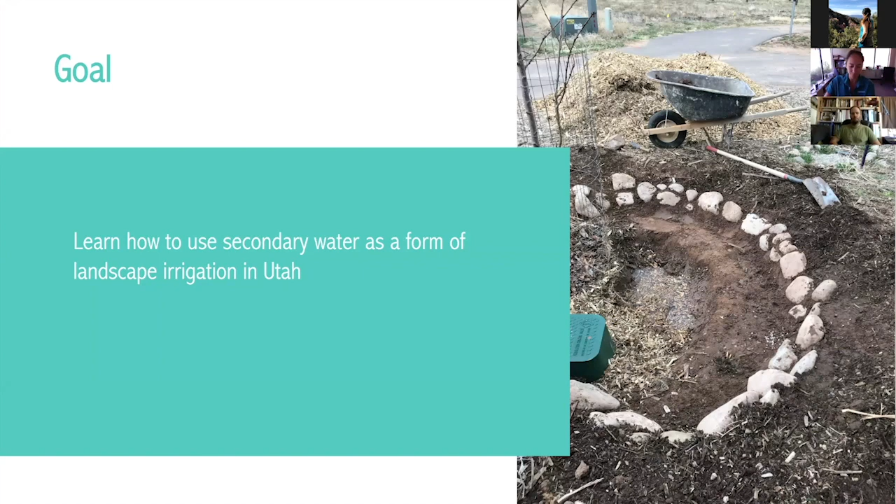And then with that goal, by the time you walk away from our presentation, even though it's only going to be about 30 minutes with us, we are hoping that you'll be able to understand the basics of Utah's gray water policy and observe system examples, and lastly, develop basic skills in implementing your system as well as you look towards designing your own home from scratch or potentially retrofitting.

Okay, so as was warned, I have a question for you all. If you could put your answer in the chat, that would be wonderful. So as we begin thinking about water reuse potential, I'm curious what fixture in the home you think the largest user of water on average may be. If you've already answered, it's okay, but for those of you who haven't, I am discounting toilets in your answer. So any fixture besides toilets that you think is the largest user of water in the home.

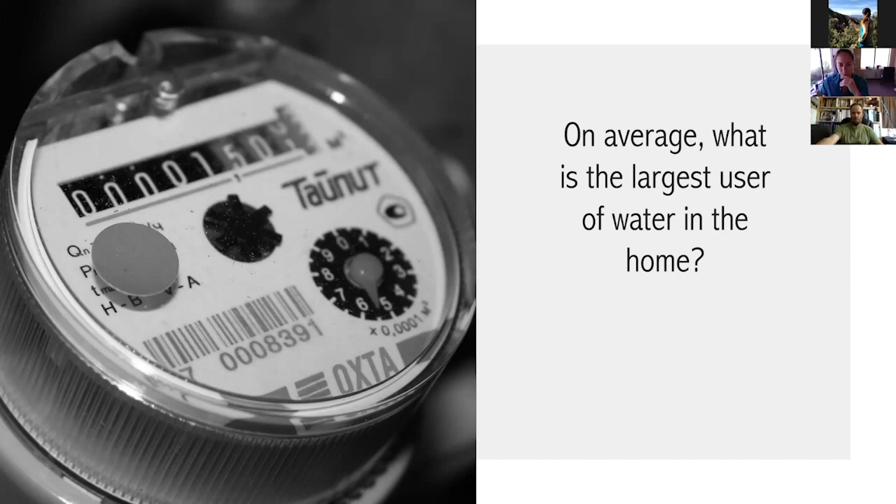So let's begin with some definitions to ensure we're all on the same page when it comes to what gray water is, but also some other terms that are associated sometimes as you're talking about gray water or water harvesting systems. So first is gray water, and you might think, gosh, I see this spelled so many different ways. It all means the same thing. It just depends where you're at, how it's spelled. So various states spell gray water differently. So graywater with an A, all connected, gray water with a space with an A, and greywater with an E, or grey water also with an E with a space, is all referring to the same thing, gray water systems.

And so the Utah Office of Administrative Rules defines gray water as wastewater from bathtubs, showers, bathroom wash basins, clothes washing machines, or laundry tubs. Gray water does not include wastewater from toilets, kitchen sinks in the state of Utah, photo lab sinks, dishwashers, water softeners, garage floor drains, or other sources that might pose a public health hazard. So that is the definition of gray water, especially in our state of Utah.

Clear water is another term that you might hear thrown around, especially when talking about gray water systems. Clear water includes water produced while waiting for your faucet to heat up. That's a common example. So you might put a pot underneath your tap, which we do constantly at our home in Moab, as that water is heating up to wash the dishes, and then we pour that pot over plants in the backyard or within our house. So that's an example of clear water.

It could also include refrigerator compressor drip, swamp cooler, and air conditioning sweat. So those are examples of what clear water is. It's treated water that is from a direct source that hasn't been used in the household otherwise.

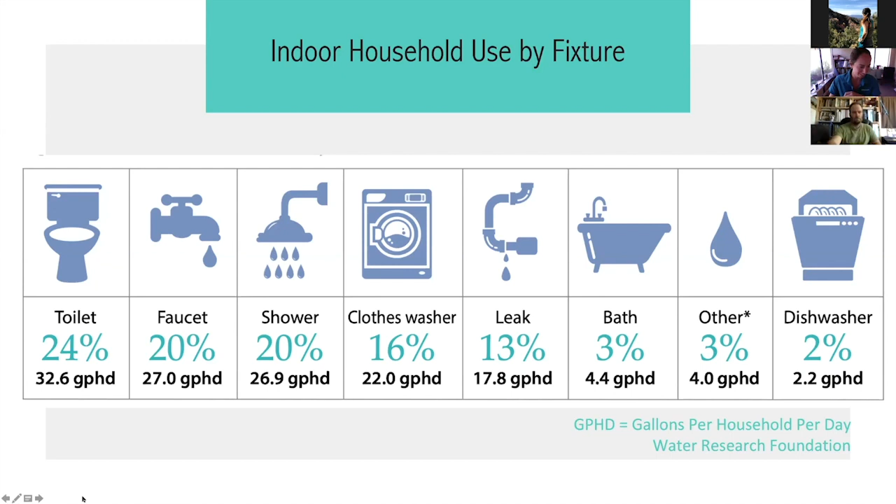Great, thanks, Roz. So I'm not going to go through the entire gray water code. I'm going to hit on a couple updated pieces of this revised code, and then I'm going to really start to look at some of the code requirements and sizing for all systems, but with a special attention to the newly allowed gravity-fed distribution system, also known as the branched drain system.

So there's like these three major things that I feel came out of this new code revision. One is that it separated gray water systems into tier 1 and tier 2. That really was inspired by some of the code that states like California and Arizona have, where they're really trying to match administrative oversight to potential risk. So in the state of Utah's new code, a tier 1 is a residential system using gravity. So just really the simplest of systems.

And those tier 1 systems require an on-site wastewater professional that's certified in level 2 to design those. In the Utah on-site wastewater treatment system, level 1 is to do soil texture analysis and percolation tests. Level 2 is to design conventional systems, and level 3 is to design alternative systems or some of the advanced on-site wastewater treatment systems.

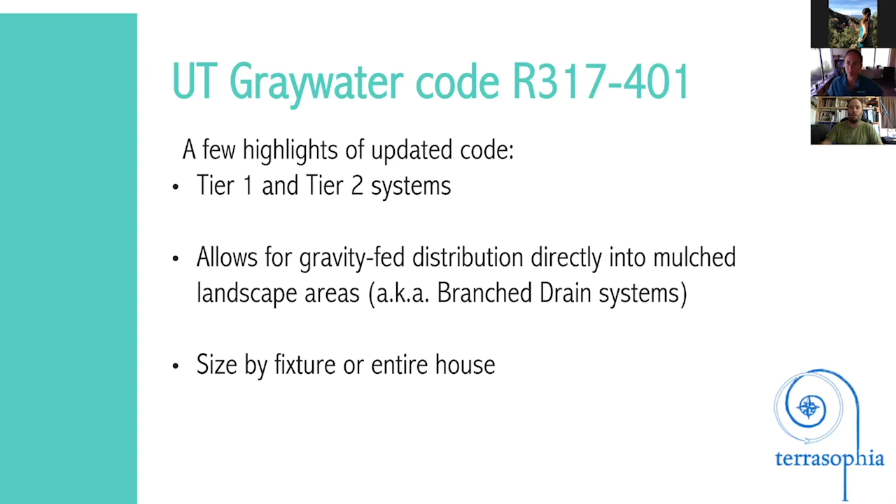And then another nice thing is that the new code allows you to size your gray water system by fixture or by the entire house. The previous code used to say you have 3 bedrooms, you need to plan on a distribution system for this many gallons per day. And the new code says, well, if you're only doing the laundry machine, you only have to size it for the laundry machine. So it gives us a lot more flexibility, especially for retrofits where it may not be possible to do a whole house retrofit, but you might be able to capture the laundry machine or a bathroom or a shower. So, all right, Nick.

So when we're designing our gray water systems, I break it into kind of 2 realms. There's one, how we have to design it to meet the code. And then the second part is the site context, and that's how we integrate it into our specific needs on site.

For these code requirements, there's a table of setbacks that says your discharge area needs to be a certain feet from your building foundation, from the property line, from any wells, culinary lines, creeks, drainages, just these different things so that we're not unintentionally discharging our gray water too close to a water body or somewhere that it might cause an adverse impact. And then as we get into sizing the discharge area, that is the square footage that you need to be able to put that gray water out on so that it can effectively infiltrate and be treated by your local soils.

And that is based on soil texture, and that's where you look at the different relative amounts of clay, sand, and silt, as well as the soil structure. And the soil structure is whether it's a sand, which is going to oftentimes be very granular. As your soil texture develops and roots and life get in the soil, you start getting a blocky or crumbly structure. And so depending on your soil texture and your soil structure, you'll be required to have a certain discharge area, essentially gallons per square foot per day.

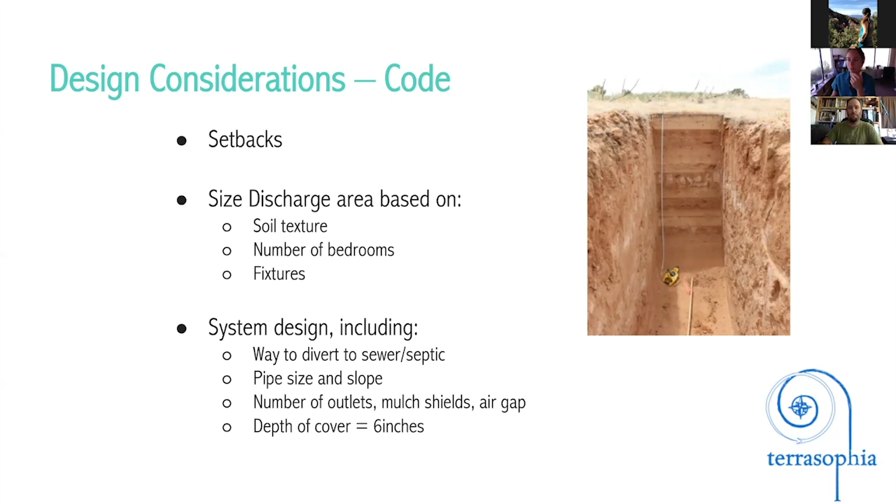And then within the code, there are these other best management practices, some of them very common sense, but they just need to be put out there to make it clear to the system designer as well as the property owner and the system maintenance that this gray water is not intended to have any human contact. It's not allowed to pond up on the surface or run off the property. You're not allowed to put it in a spray irrigation, any sort of sprinkler that will aerosolize what's in that gray water.

And then as you start to get into your plant selections, it can't come into any contact with edible portions of plants. So you don't want to grow carrots in your gray water system, or even really lettuce or something that has a fairly close edible portion to the soil surface mulch interface. And then it's also really important to think about what you're putting down your drain.

A lot of borax or other salt-based components, and then generally you're not wanting to put a bunch of bleach or other chemically hazardous things out there. And the code specifically says that photo labs and some other things like that are not considered gray water, and you're not allowed to discharge those into your landscape.

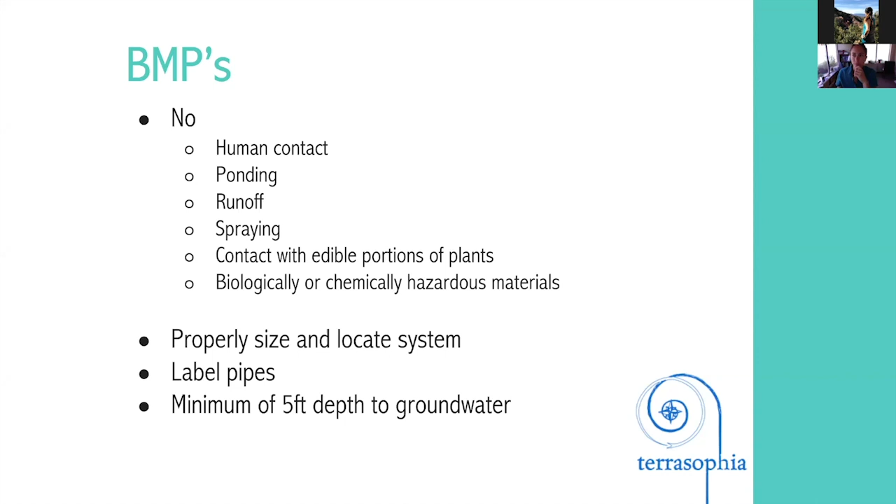So that's kind of the code context of how we're starting to think about these systems. And then I think where the rubber hits the road is, how do we actually integrate a gray water system into our landscape? And so it really becomes a bigger design picture of looking at, how do you actually use your landscape? What existing features are there? Where can you find that suitable space to have your discharge area? And then how do you get the water to that space? And so that comes into your elevations and grading.

So if you think about it, if you're having a 1/4 inch per foot, every 10 feet, you're dropping 2.5 inches. So the further you go, the deeper down your pipe is going to end up being, which isn't necessarily bad, but it's not necessarily good either. The closer we can keep that pipe to the surface, so that we're just hitting that 6 inch of cover, but not getting too much deeper, saves on cost of installation, also saves on basin shaping, because you don't have to dig as deep of a hole and play around with stabilizing those side slopes, and keeps that water up closer to the most biologically active parts of the root zone and the soil biome.

And then it's kind of going back to Roz's introduction, is really, what are all the water sources? How do we integrate gray water if we're looking to have it be some portion of our landscape water portfolio? How do we also design our landscapes so that we're making best use of any rainwater and stormwater, and if you have a swamp cooler or an AC unit that has some bleed-out water, how do we start to look at all our different sources of water and match them up to their best use?

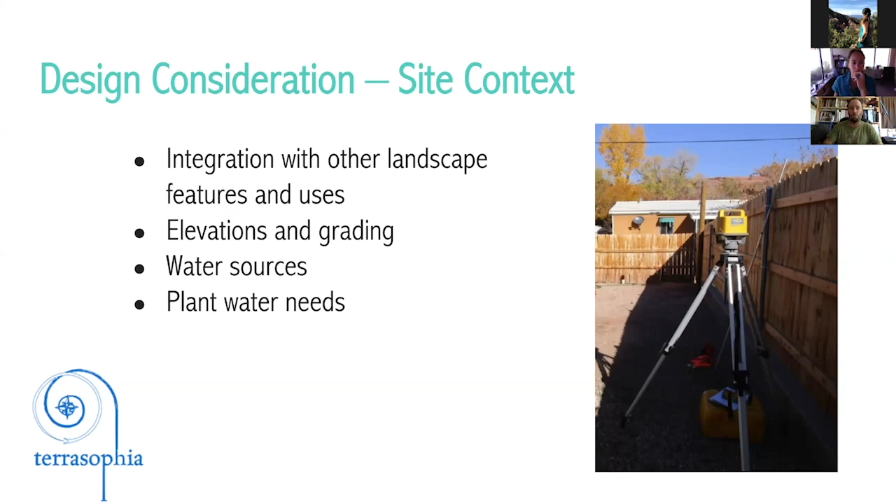And so I like to think of it as the anatomy of the branched drain system. You know, what are all the parts, head to toe? So we start with the source. That could be the laundry machine, the shower, both, all gray water sources within a house. Then you have what's called a three-way valve that I mentioned, and that would be located indoors inside of the dwelling, and that allows you to switch from going out to landscape discharge to going to your septic or sewer.

And then from that three-way valve, you have what we call the stub out, and that is the piping that goes from your indoor plumbing of that three-way valve outside of your building envelope and allows the opportunity to then be continued into the landscape. And that portion of it is governed by building code, doing that interior plumbing work in terms of that three-way valve and the stub out. And once it's outside of the building footprint, it turns over to health department jurisdiction and these gray water codes.

And so at this point in time, it's legal to stub out your building at, say, time of construction and just put a cap on that gray water and come back to it later in terms of actually doing the final design and turning that system on. And so there have been a lot of homes in Moab that have been built over the last 5 to 7 years in anticipation of someday the code changing that are all stubbed out, and now they're ready to go, and they saved the cost of an expensive retrofit.

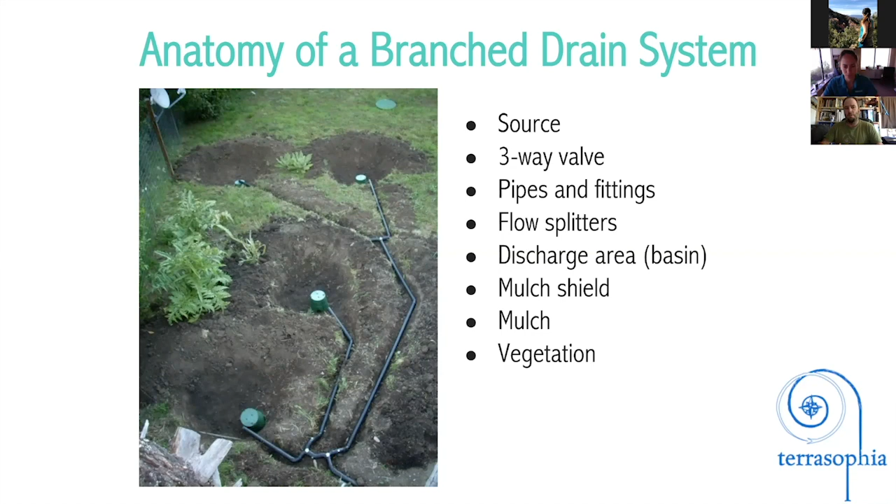And then it goes to your discharge area, which in this case is the basin. You have a mulch shield, which these aren't hooked up yet in this picture, but those are those green irrigation boxes. And then this will eventually have mulch and vegetation added. And so now we'll kind of go through the different components. So here's a picture of a three-way valve.

Jandy is one common version. There's others, and it's just as it looks. You turn it one way, it goes to the landscape. You turn it the other way, and it goes to your sewer. And so the upper right picture shows a little irrigation valve box built into the floor of the home, so you're doing a load of laundry and it's pouring rain out, you can just pop that off and turn the valve if you remember.

The bottom right is a picture of a switch. It's possible to hook up a solenoid valve and have it so that you can just flip a switch. And sometimes that's really important for convenience, especially for retrofit situations, where you might have to locate this three-way valve under a crawl space or somewhere that it's not as easy to access, and some of these automation options might be the way to go there.

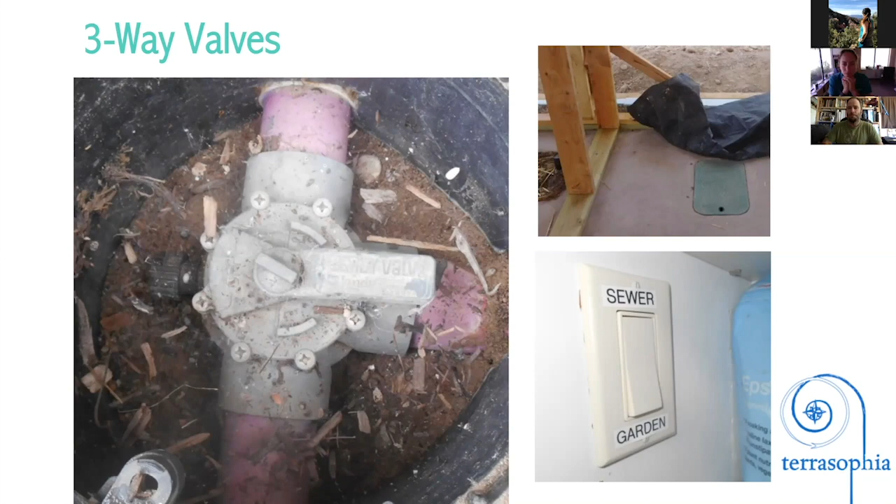So then next is the flow splitter. Its function is exactly how it sounds. It splits the flow. So the upper left shows one in action where it's coming in. That's the first split coming out of the house. It hits that flow splitter. It's called a double L, double ELL. That L is ELL, and they're set so that they're level, so that that water hits that fin and it goes pretty much 50-50.

And it's nice to have that clean out option there just in case some lint or some hair or something gets stuck on it. I haven't had or heard of big issues with that, but it's easier to drill a little hole and put a plug in and keep it accessible than it is to try to snake up the system from the bottom to unclog it in the event that something happens.

And then from those flow splitters, and most systems will have multiple splitters. So the first time you split, it goes 50-50. Next time you split, now you're at 25% flow, 25% flow, and you can kind of parse it out that way based on the number of outlets that the code specifies and your unique landscape conditions. There may be situations where you choose to have more flow splitters than is required in the code. And then the right hand picture shows the purple pipe going out to the mulch shields.

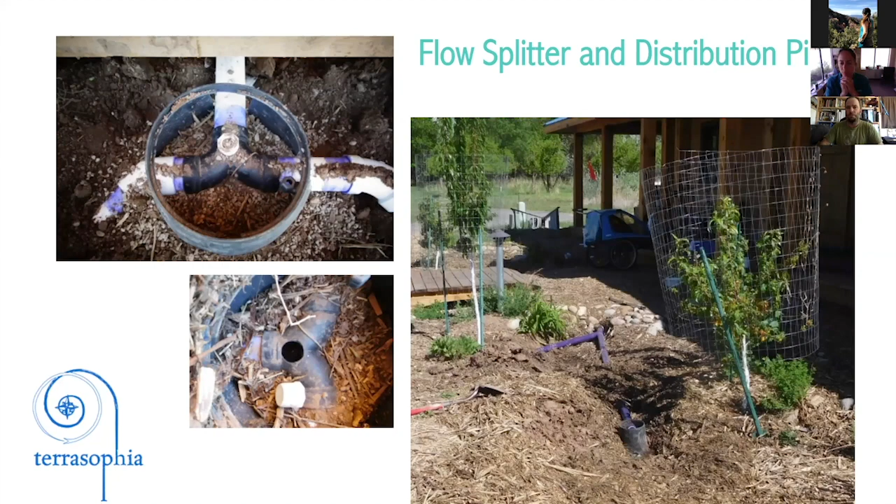And so here's the basin. Just as it sounds, it's a hole. You want to get the bottom of it pretty level, and if anything, actually sloping gently away from your outlet to really help as that water comes out in that one point. We're really trying to help it spread out, percolate out, move through capillary action out over that whole surface and infiltrate through that surface volume.

And the bottom right picture shows those same outlets with the mulch shields. And so the code specifies that the mulch shield should have a minimum of 5-gallon surge capacity. So that's when you have a tub full of water and you take out the plug and all of a sudden you're draining 20-30 gallons out into the landscape all at once, that has the capacity to have a little surge as it comes out faster than it can move into the soil and move through the mulch.

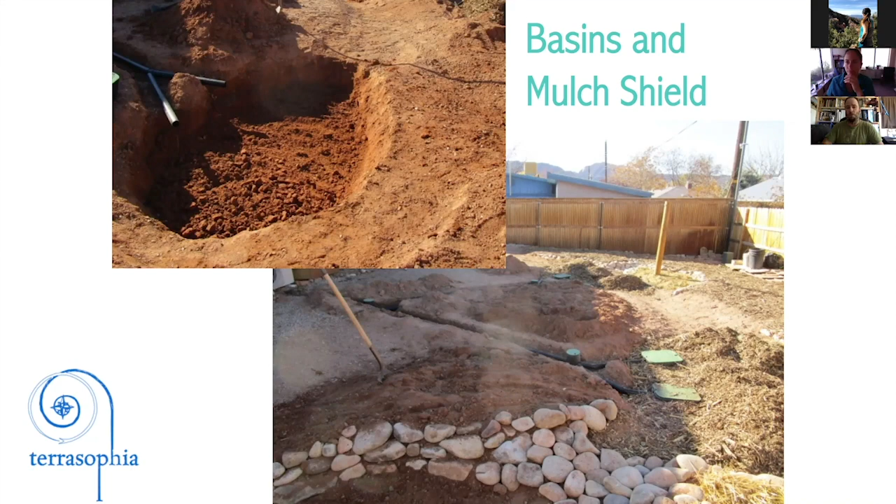And then this next picture is showing that same spot, but when it's all said and done. So that's with the 6 inches of cover, that's all the pipes backfilled. Essentially, you can't even tell that it's there, but if you scratch around in the mulch a little bit, you'll easily be able to find those mulch shields, those outlet boxes, and you can pop the lid off and have a peek and make sure there's no ponding or adverse effects happening.

So there's a close-up of the outlet into the mulch shield, and it's really providing two functions. One is that surge volume that I mentioned, but the other is it's got an air gap. So per the code, there's supposed to be at least 6 inches between the pipe and the bottom of the mulch shield. And what that does is not only allows the surge volume, but also protects against roots being able to grow into there and up into your pipes, because there's not many plant roots that can grow in the air.

And so it makes it real easy to look in. You can see if there's roots clogging the sides, the perforations in your mulch shield, but it really gives you some protection against roots being able to get into your actual piping. Whereas if that was just covered in soil, or at ground level with some mulch over it, you'd start to find over a number of years that roots are going to try to go where the water and nutrient is coming from.

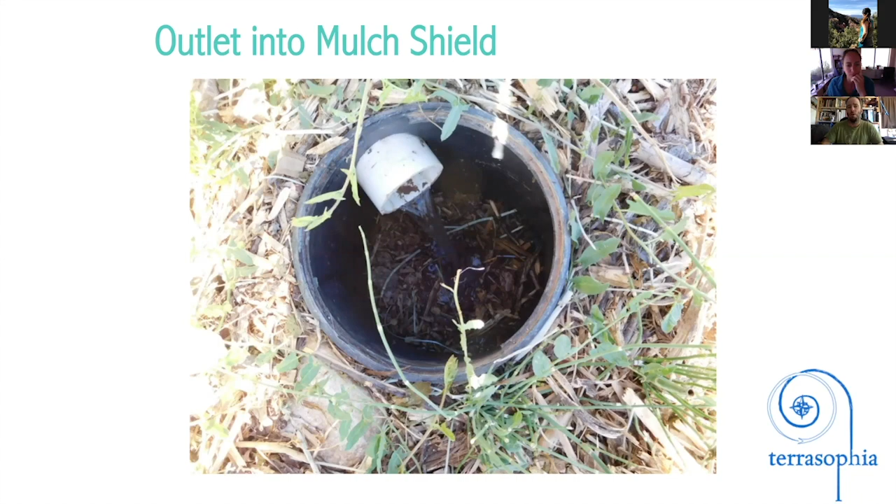And so in terms of thinking about planting, so you've got the basin itself, and that is going to be full of your wood chip mulch. So that's going to have that 6-inch gap and then the 6 inches of cover. So generally you're looking at, for these branch drain systems, a foot or so of mulch in that basin.

So that's not really a place that you're specifically growing plants, but it's a place that you're creating a moist, nutrient-rich sponge that plant roots on your benches and upland portions can grow into and tap into, or really usually grow under and tap in as it's soaking down through. Your higher water use stuff, or your stuff with less robust root systems, you put on these benches, and that's really only going to be, say, 9-12 inches above the bottom of the basin, so that once you get a plant in there, those roots are hitting that moist soil pretty quickly.

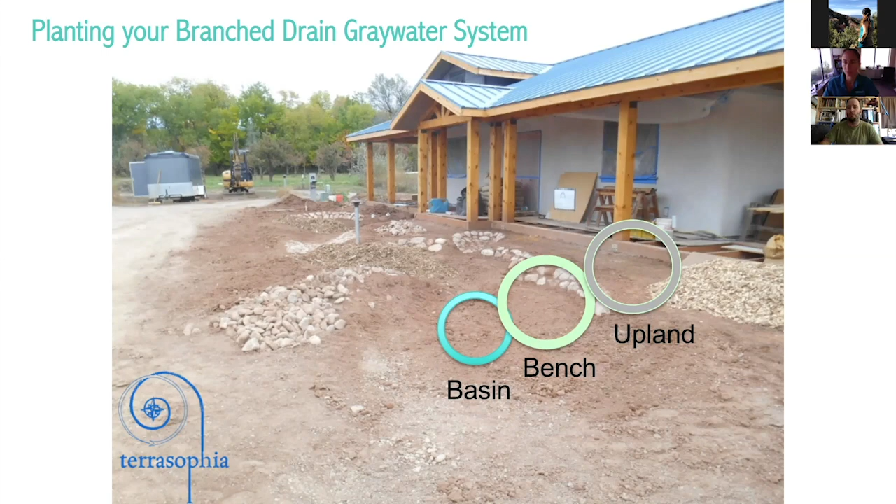And then some stuff, like some of the trees and some things that might not need quite as much water, you put in what I call the upland, which is still like the perimeter of the basin, but is maybe a foot to 2 feet in elevation above where that water's discharging. So it's going to take those plants a little bit longer to tap their roots into the sponge of the gray water system.

And there's that same property. This is Roslynn's place again, and it's a little bit hard to see, but you can kind of tell on the left of the picture that Russian sage would be in the upland, and then on the right, I can't actually tell. I think that's some lavender, and I know there's some echinacea and the blue flax, all down on that lower shelf, so that their roots can tap in there a lot more. And then the fruit trees are just loving it, taking up the space they need and tapped into that resource. Yeah, and those fruit trees are planted on the bench.

And then from an operations and maintenance side, it is required in the code to provide an operation and maintenance guide with the system, so that for the homeowner, and especially if there's a change in homeowners, there's a record and a document of what the system is, some pictures of it, what to expect. But overall, these are fairly low maintenance, but they are not no maintenance. And so some of the common maintenance things are visual inspections, just looking at it, make sure that there's no clogging, no pooling or runoff, no odors that you smell.

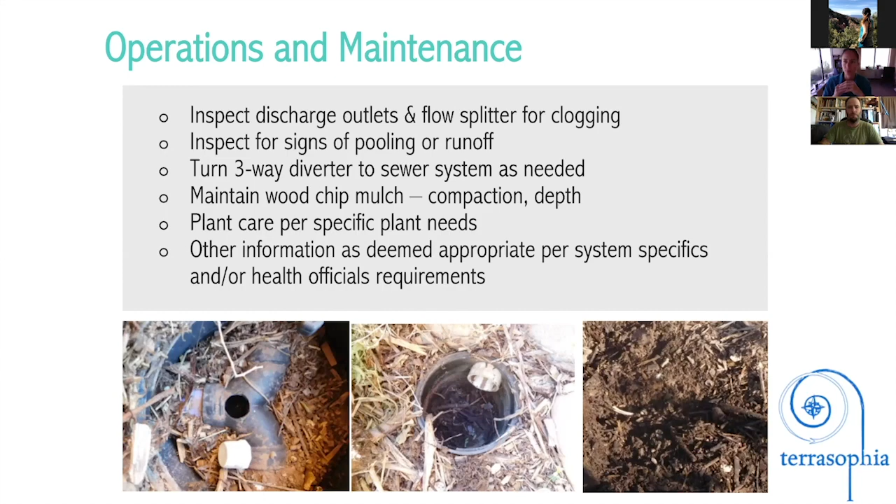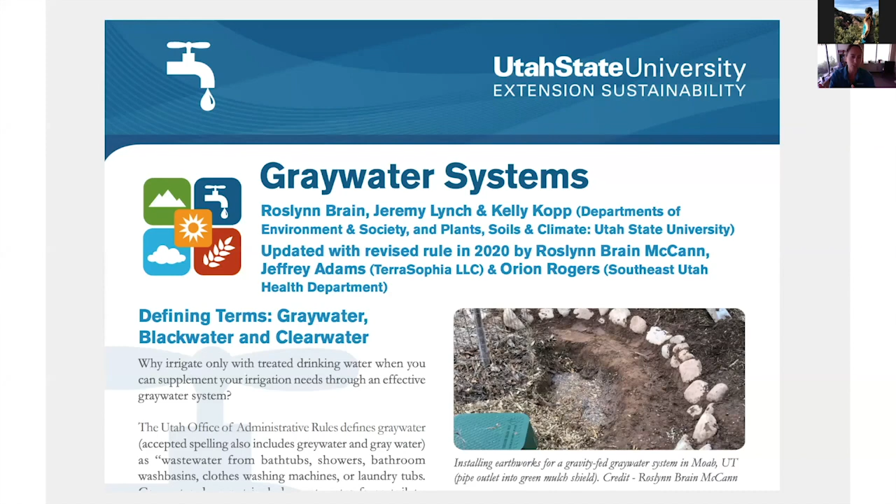So great, thanks, Jeff. With the updated code, which was just updated in the spring, we recently launched our updated fact sheet to go along with that, and Candace was going to put the link in the chat. This fact sheet goes over the basics about gray water systems, and you'll see some images from our slides today and information from the presentation as well. It's a great quick resource as you're looking more into installing potentially in your own home.

And so just a quick recap: hopefully through what Jeff and I have talked about today, you'll now understand the basics of Utah's gray water policy, will have observed system examples in the presentation, and lastly, developed basic skills in implementing your own system. We couldn't get into too many of the details in the time frame about retrofitting and other aspects,